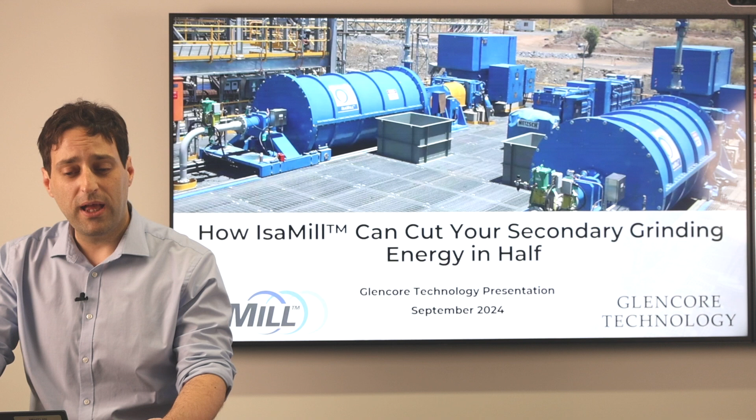Thank you very much, Stephen, for that very kind introduction. Now it's my absolute pleasure to take you through this webinar. What I'd like to discuss today is the journey of how the IsaMill has evolved into coarse grinding applications, and give you a little bit of detail on some of the work we did in Stawell and Manitoba on how we were able to put an M100 in a secondary grinding duty and show some pretty remarkable results.

Now, the IsaMill is not a new technology. It's coming close to 30 years now, but it's got a pretty big install base. We've had 152 of these around the world, and over that time we have modified them to improve performance, reduce costs, and generally make a much more improved product.

The mill itself can take feed up to 850 microns now with F100s of 3 mil. That is a bit of a step change from what you may be used to, and this is driven mostly from the new advancements in media that's on the market. Relative to other mills, we use lower SG media. The IsaMill has about a peak performance of 3.7, 3.8 SG media. We don't see the efficiency gains with that higher SG, more expensive ceramic media.

The mill itself is horizontal. That means you can start the mill fully loaded and you have enough breakaway torque where you don't have to dump the charge, which makes things safer. And there's no working under loads, no working at heights. It's got a tight particle size distribution, which I will touch on in a little bit, but it produces a much sharper product compared to our competitors, and quite proudly it scales up 1:1, through the very conclusive signature plot test work that we conduct.

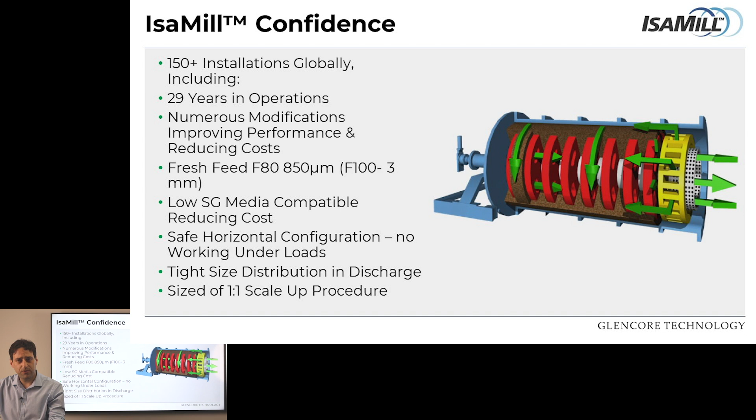The traditional application of the IsaMill goes back to its history. The IsaMill was originally developed for a problem: a 7 micron liberation grind target. Back in the late 1980s in Mount Isa, they recognized they had to grind to 7 microns.

At the time, they thought, let's see what technologies are out there, let's give it a go. Using conventional technologies like tower mills and ball mills, they found you required an extraordinary amount of power to get to 7 microns. When you actually got there, the influence of steel media created a significant problem with flotation results. Iron hydroxide formed on the surface of the particles and damaged grade and recovery. So they looked outside of the business.

They worked with our partners at Netzsch and developed the IsaMill, which we successfully installed in 1994. That duty was a regrind application, which you can see here in a typical flow sheet. I've used the Jameson Cell as an example.

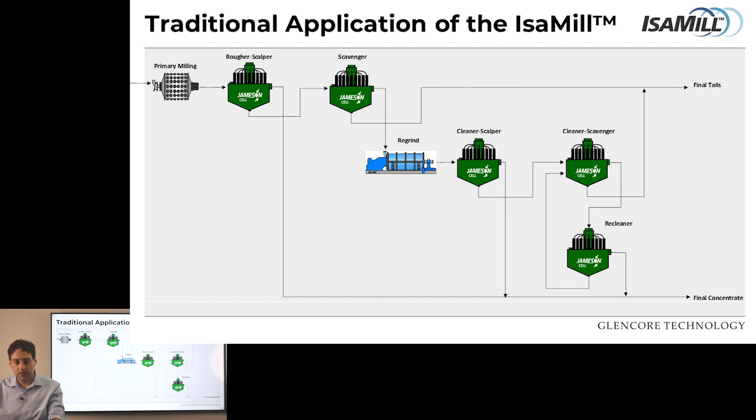Since we installed it back in 1994, that was predominantly the install base in regrind duties and pre-leach grinds. However, that was a long time ago and things change. We know mills are getting bigger and media is getting bigger. So why can't we expand our scope? There's no reason why not.

If you look at the industry today, comminution circuits are the largest single consumer of energy on a site, with up to 25% of the energy going into comminution circuits. That's a lot.

In previous studies, I know in 2006, 2008, Anglo piloted a HPGR IsaMill circuit and it theoretically reduced specific energy by 17% relative to other circuits. We know in regrind mill trade-offs, comparing ball mill versus IsaMill, you can save up to about 29%, not including the cyclone feed pump. So we know stirred milling is more efficient in certain duties.

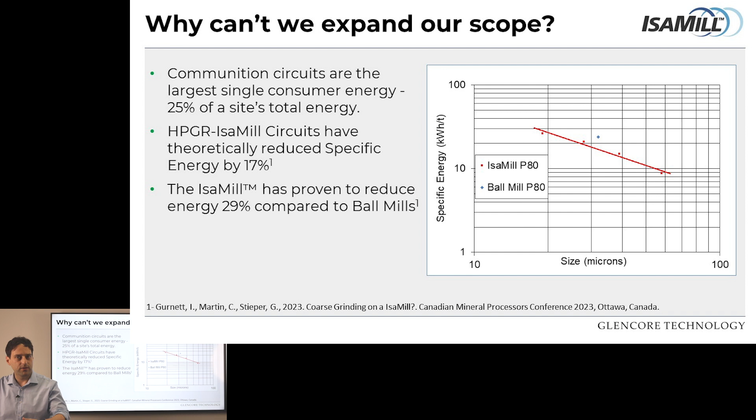So what is stopping us moving it in circuit? And to do so, you have to do it in a stepwise manner. We're not going to move to primary grinding in a mill without slowly, methodically ensuring we get it right.

Now, there's a big push on coarse particle flotation at the moment. The IsaMill can grind that. We've proven it, this is not new. With 6mm media, we know we can grind CPF concentrates.

To help further demonstrate that, I've used two signature plots - a single stage and a series grind. The single stage was taking about a 450, 500 micron concentrate down to about 30. The series grind was taking about the same feed down to 10 microns. As you can see on a signature plot graph, where your size is on the bottom and your specific energy is on the side, it's a very linear relationship with good correlations.

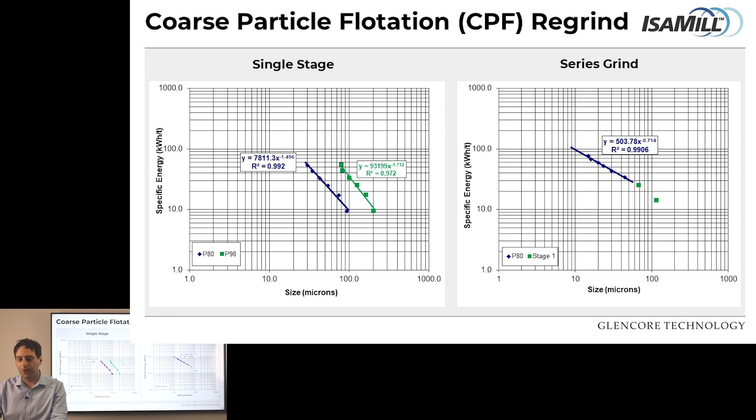So the IsaMill can do that, and that's 500 microns, which is already a bit of a step, but let's really have a go, let's really try to push it. So what I really wanted to touch on is, why is this all happening now?

The fundamental difference is that those previous signature plots used 6mm media. There is much larger media on the market today. If you look on the right hand side, this is a photo of my desk with the view, and you can see the media changing throughout the different sizes. On the far left we have 2mm media, in the middle about 5mm, and then across from that we have 10mm media and 24mm media. This is all rolled media, and as you can see, it's getting more competent, it's getting larger, and it's going to last longer.

So if we're going to go to coarser particles, we have a bigger hammer to break those particles. But do we have the mill to do it? And yes, that's actually true, we do.

As you can see here on the left, over the last couple of years we spent a lot of effort making the mills bigger. We've developed the M20,000 with a 5 megawatt motor, the M30,000 with a 6 megawatt motor, and the M50,000. Mills are getting bigger, media is getting bigger.

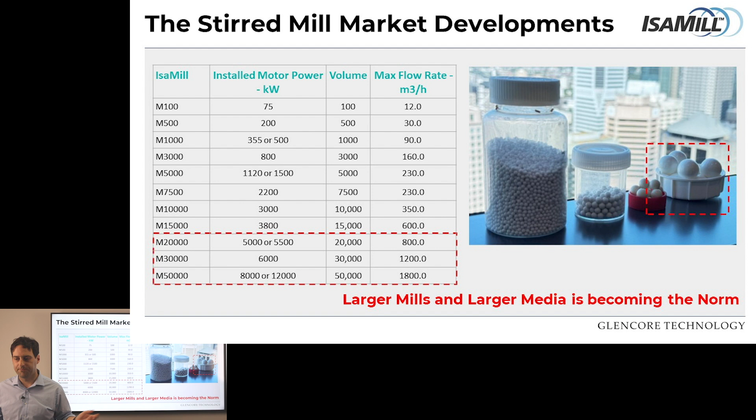Isn't the next logical step to move the IsaMill for bigger feed? We've got the media, we've got the mill. Why not? And this was the whole concept behind the secondary grind trial in Manitoba.

That has really prompted us with the new circuit design of the future. To me, this is it. Here you have primary grinding going to an IsaMill and secondary grinding duty, similar to the test work I'm about to show. We have a coarse particle flotation unit, which is an area we're doing a lot of R&D in. Con from that feeds a fines scalper. The con from that is your final concentrate. Your tails get reground through an IsaMill in a traditional duty, through a Jameson cell cleaning circuit. That, to me, is the circuit of the future, and this is an area we're really pursuing quickly.

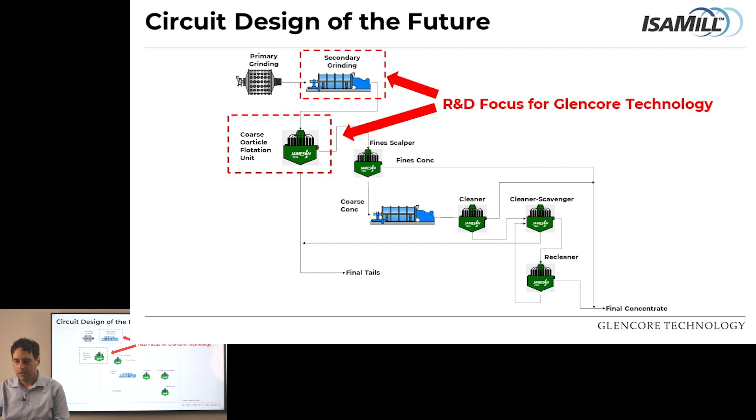So I've kind of laid the groundwork, right? Mills are bigger, media is bigger. I have the concept - how do I actually test it? And this is what I really wanted to demonstrate through this webinar.

To test this sort of concept in the current configuration, to ensure one-to-one scale-up, we actually have to move an M100. An M100 is a smaller IsaMill, the smallest one of our commercial mills. That allows us to use 8 to 14mm media. In a lab, there's an issue with larger media because you have to maintain a gap between the disc and the shell of 5 times your largest media diameter. This is all to ensure that you maintain fluidized behavior and get an accurate energy reading.

So if I can't use more than 6 mil media in the lab, I'm going to have to use this on site. So what we do is move this to site, take a feed, and feed that through the mill with varying media loads, and from there we can develop a signature plot. From that, we can compare how the existing installations are running, or a new concept.

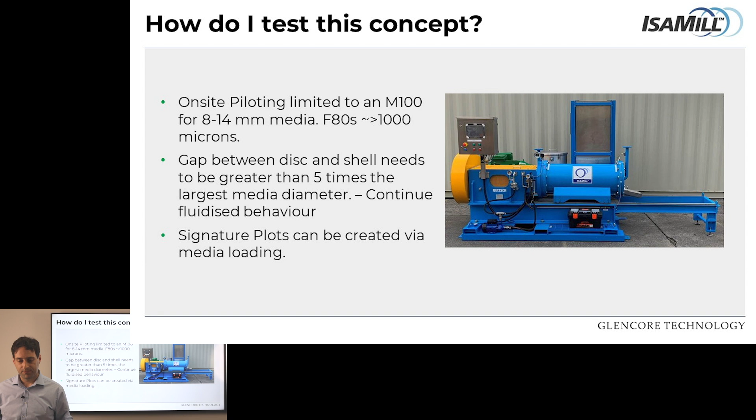And this is what we did at Hudbay. So let's go through the trial that we presented a paper on back at CIM, and this will hopefully provide some questions - hopefully I'll give you some answers. As we go through it, I really want to say the whole purpose of this trial was to demonstrate proof of concept, garner interest, and if you actually want us to do a trial on your site, please reach out. So let us begin.

In Manitoba, two metallurgists, myself and one of my colleagues, attended the Stall mill. Our purpose of that visit was to conduct a proof of concept grinding test in a secondary grinding application, and we wanted to evaluate some of the larger medias: 8mm 3.8 SG media, 8mm 4.5 SG media, and 10mm 3.8 SG media.

Now, you'll notice - why would you want to do 3.8 and 4.5 when I specifically said that we use lower SG media compared to our competitors? The purpose of that is all to do with reduction ratios. We wanted to evaluate whether the higher SG media could provide a higher reduction ratio in efficiency. The rule of thumb we typically use is a reduction ratio of 8 per media type. We were trying to expand it and see if we could do this in a coarser duty here.

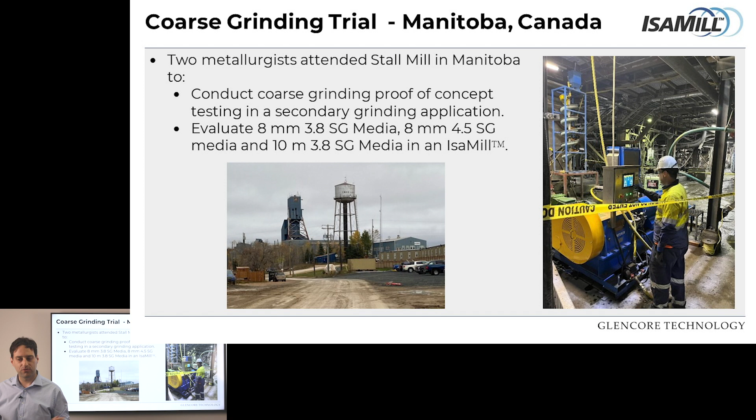This is the Hudbay Stall mill circuit. I just want to take you through a bit of a run-through on it. So up here we have the Stall rod mill and ball mill circuit fed from 2 fine ore bins. There's also the chisel circuit that also grinds the feed for flotation. We have a pre-float circuit that removes the talc, followed by a copper rougher circuit and a zinc rougher. We've recently spent a bit of time there because we put some Jameson cells in - you can see it in the talc recleaner, the copper rougher, copper cleaner, zinc rougher, zinc cleaner. That circuit is very, very efficient, but it also allowed us the opportunity to test this concept.

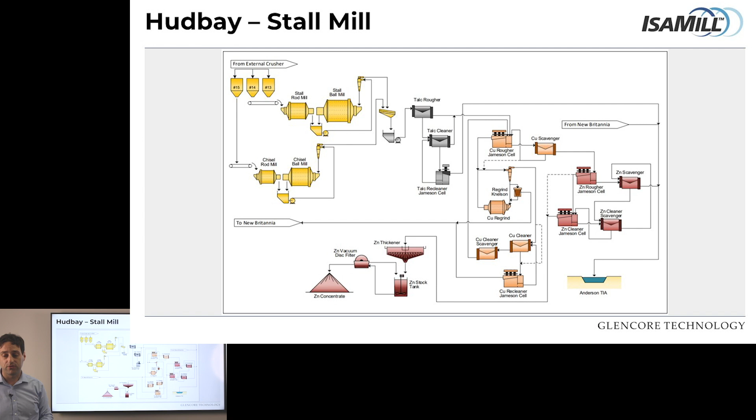So, circuit, very quickly - where did we do our work? We actually did it on the Stall rod mill discharge. So what we did was we sampled a feed on the discharge pan, and that fed directly to the M100 through gravity.

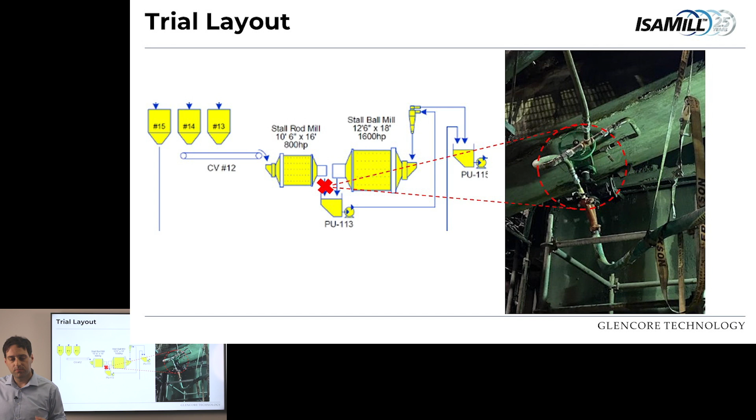As you can see, this was the installation. I will admit, it's not the most ideal sample source, but like I said, this is proof of concept. Let's see what we can do with what we have.

That line fed via gravity all the way into the mill. As you can see here, we had the isolation valve, two flushing ports, goes through into the mill, sample point at the mill, directly into the feed end, through the mill, out the discharge to the floor where we recovered it via sump.

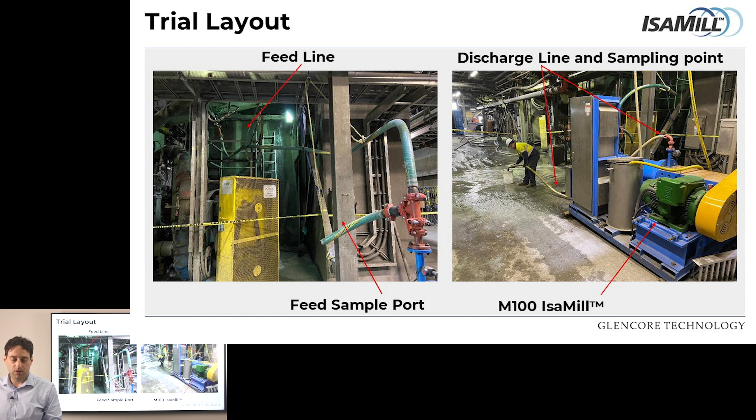And we did that with various media loads and concurrently sampled the ball mill that was taking the same feed at the time. So how did it go? That's a very good question.

So we learned a lot. We learned a lot of what the mill was capable of and what we had to change. So with the 8mm results, we learned two things.

At a higher rotation speed, higher tip speed, we noticed that the energy consumption was much more substantial versus the lower tip speed. That made us think. But when you think of the internal classification device, it makes more sense because you're retaining more media, because there's a much faster back current in the mill.

For the lower feed, 30 Hertz feeds, we noticed that at 10 kilowatt hours per ton, similar to the existing installation, we were able to produce a much sharper product size distribution, which is what we expected, and we were much more efficient on the fines.

8mm was great, proved the concept, but when you look at ceramic media, you actually have to understand the purpose, what is causing the breakage, how big's the hammer in the attrition collision.

And the step change from 8 to 10 millimeters was substantial. So from this, what we could expect is once you move to 10 millimeters, you're going to have a much more efficient grind. And we'll get to that.

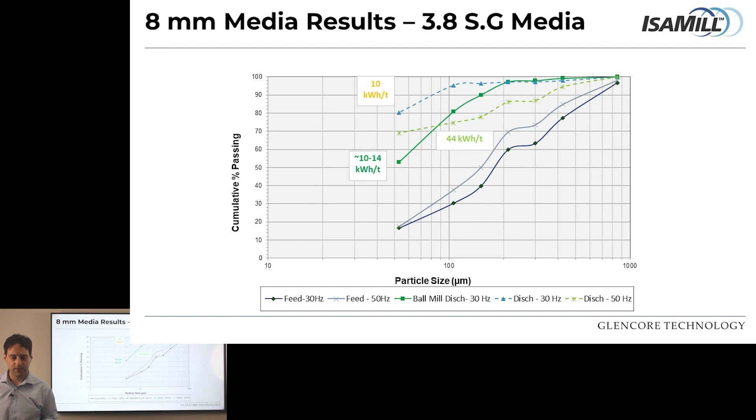When we tested the 4.5 SG media, we put about 2 kilowatt hours per ton, but what we found was it was quite inefficient. This correlated to what we'd seen in other laboratory-based mills on fixed media loads with the higher SG media. It doesn't net the increased power draw that is generated with the media. It doesn't actually improve the grind.

This is something you actually need to think about with stirred mills: increased power draw doesn't necessarily improve to increased efficiency. So what we found, after we bogged the mills a couple times, the 4.5 SG media did not work in this scenario with the 8 millimeter media.

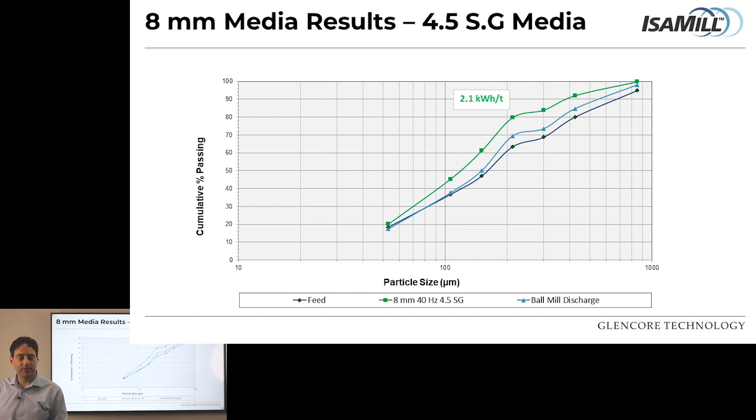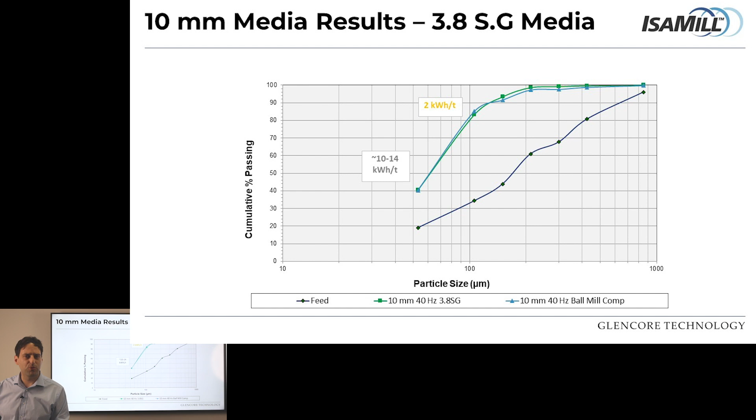This kind of really got us excited and really prompted us, and is what's driven a lot of this push into coarser grinding and why we think we have a pathway through to secondary grinding duties.

Now, I'm not going to lie, this was a proof of concept trial. There are things you learn, and there are things you recognize you need to change. I'm just going to go through the M100 a little bit - as you can see here, we've got the mill opened. It's a disc-based mill, and what we found was with coarser feed and coarser media, gaps that are normally okay start to become a bit tighter.

So we recognized for future trials we had to reduce the gap between the non-drive end and shaft end cap - so between this and the wall.

And with the current dimensions, there is actually a limitation on the size of media you can use. If you look at the rotor, you'll see those square fingers over a screen. There's about a 50 mil gap between the two. If we move to larger media, we actually have to change that back to that rule of five times your largest media diameter.

So, ergo, we have to redesign the screen. The feed inlet, when you go coarser and start making small restrictions, things start to block up. As you can see, it was 10 millimeter media, 2.5 times the diameter, so we know the feed inlet was too small. Something we needed to modify.

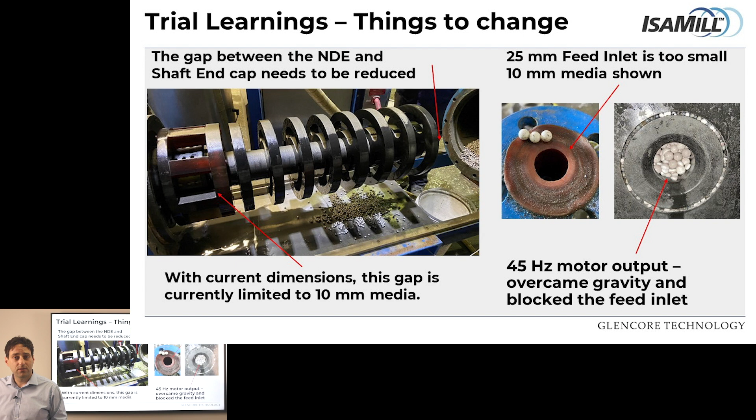Feeding via gravity can be a problem in these duties, and while we recognize that we have to pump the feed in, pumping the feed will make things a bit better. But like I said, this was a gravity-fed proof of concept test.

Now, other things: you're sampling from a discharge pan, so you're going to get variable feed density and relatively low flow. This is not ideal, I'm not going to dispute that, but this is proof of concept. We want to demonstrate what we can do.

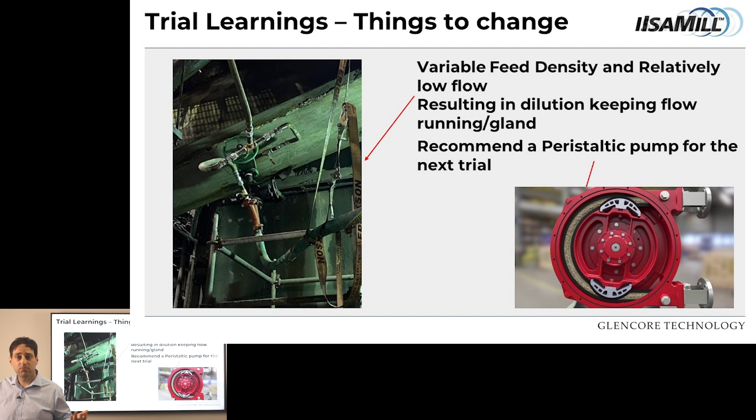What happened was we had to run a little bit of water in occasionally just to ensure we had flow going through. To get around this, we just want to pump the feed next time, which logically makes sense. But at the end of the day, this was about proof of concept, and the concept is proven.

So what next? This is one of the things I'd like to share. We recognize that for the mill to be successful in secondary grinding duties, we need to treat feeds at least 2 to 3 millimeters F80, with top size of at least 6 mil. We know from that trial that we have to trial new components.

We recognize the mill has to be slowed down. We also recognize that the discharge screen needs to be redesigned. The rotor has a classification effect that needs to be tweaked. The amount of media getting into the mill has to be tweaked as well. And even slower mills require modified disc designs.

So we recognize that we can do it. Now we have to go through the pathway to do it, and that's what we're doing, that's the pathway we're headed on. If this is something that interests you, please reach out. We're very happy to come to site and do a secondary grinding trial at your location.

So, perfect. I've gone through the secondary grinding, explained everything that's involved and where we're headed, but I also wanted to give you a side note on some of the stuff we're doing to really validate those larger mills, and that's what the next 2 slides are for.

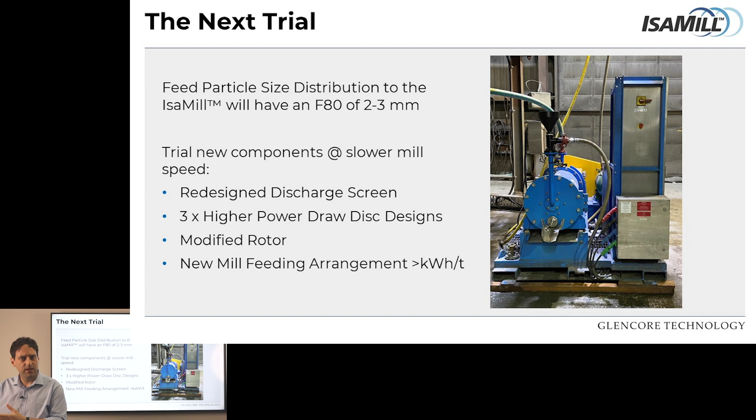There's been a lot of feedback that people want larger mills, and these larger mills are for the secondary higher throughput duties. We've listened and we've developed designs. We have a larger mill, so here's the 50,000 design on my left. That can hold 50,000 litres, about 8 to 12 megawatts of power.

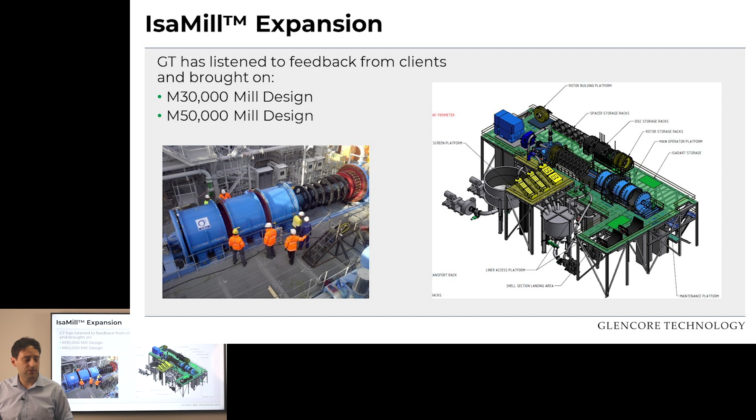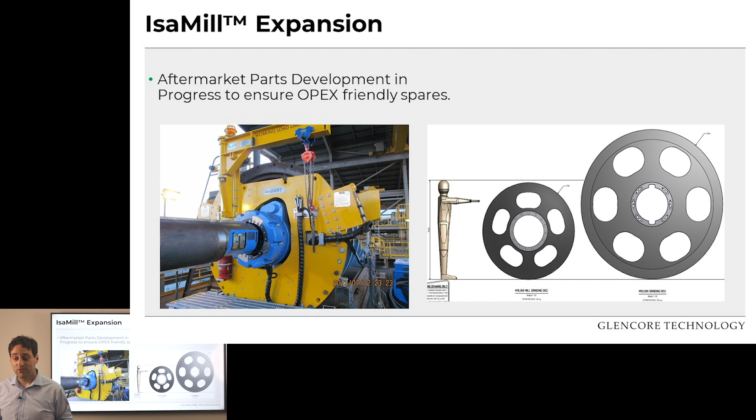We know that if you go larger, you have to be clever on how you provide aftermarket parts, such as a shell liner or discs, so we've done things like segmented shell trials to further that. We know parts get big, so we've already thought about and got some crazy robotics in to help move discs for you. We recognize this is the fast way - we're developing the parts and we've proven the trials. Stay tuned into this space and you'll see a lot more on secondary grinding and coarser duties from us in the future.

Please reach out if you have any questions. Thank you.